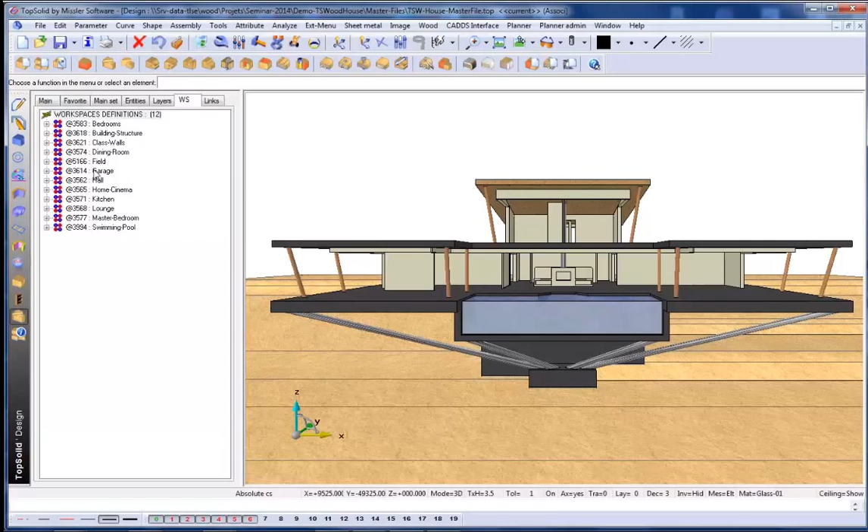Hi everyone, what I'm going to show you today is how to use and create library items to further reduce drawing times in your projects.

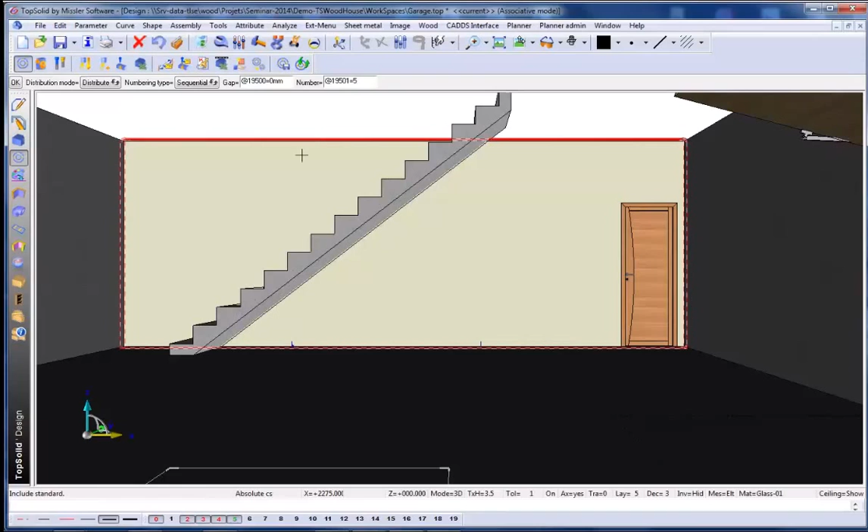Let's open up this garage and bring in what's called a volume. A volume allows you to create an area you may want to fill with, say, a unit or some piece of joinery. So let's create five volumes here and cut it so it's got that slope underneath the stairs.

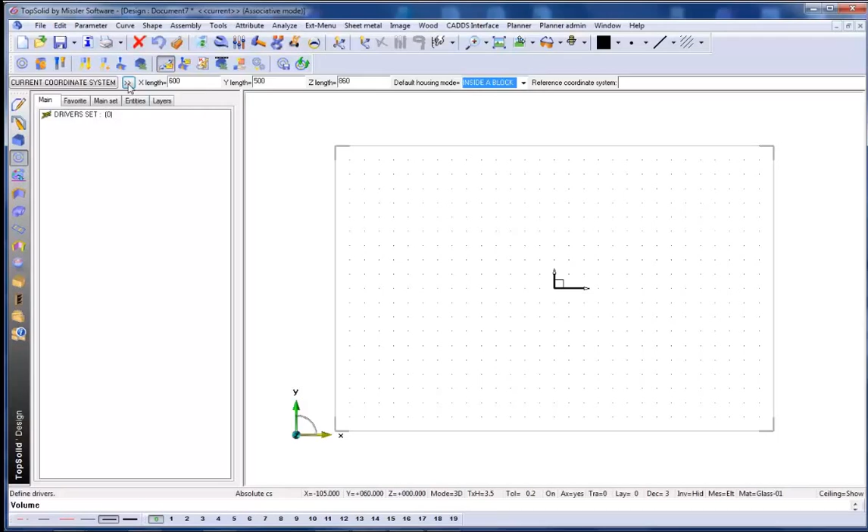Now let's open a brand new drawing to create a brand new library item. We'll start with a driver block, call it volume, and input a few sizes. We'll give it a slope of maybe 30 degrees, and once we rotate it, you can see that slope. So again, it's just a volume.

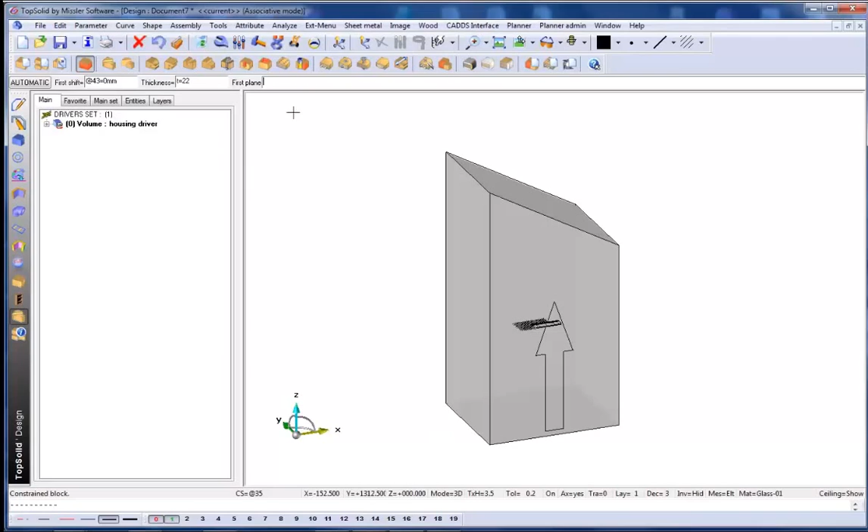Let's now start filling that volume in with actual panels. The thickness of my panels might be 22, could be 25, 18, or 16. Let's raise this maybe 110 mil off the ground because we might want some adjustable feet.

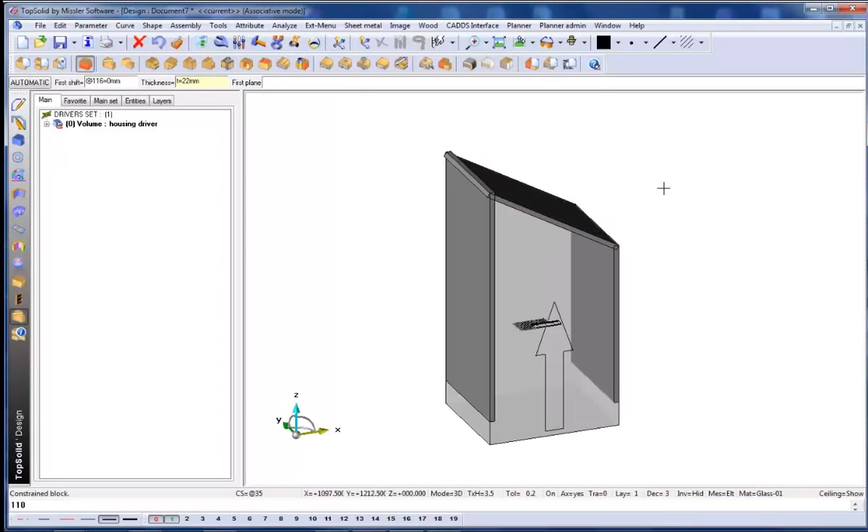Let's create the other side. You can copy that as well if needed. Now let's create the top also, and even though it's at an angle, we can create that top. So now we're going to create our bottom. And there we have it.

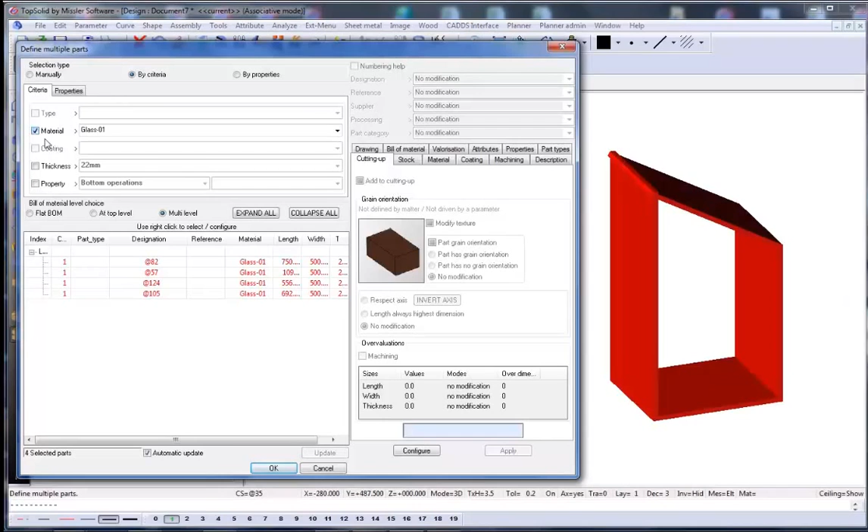Next step, we may assign an assembly here and assign parts, names, materials, and so on. So now let's assign a new material, apply that, and press OK. You can see the material applied to that particular part.

Now what we're going to do next is assign a miter to both ends, and again it's an automatic process, you don't have to draw the miter itself.

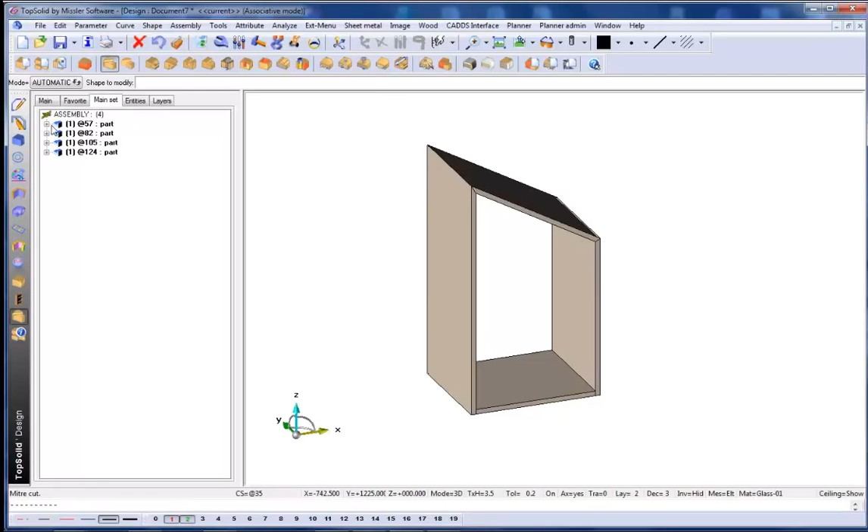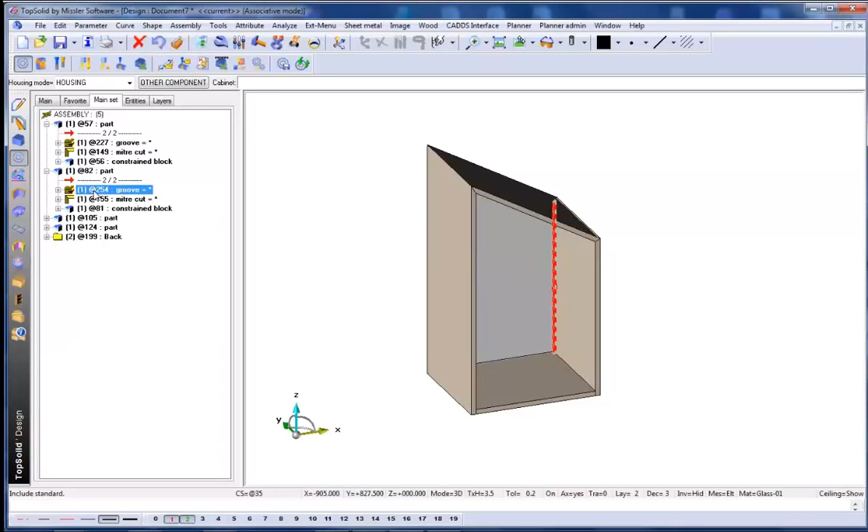Now next we can bring in our back. With our back we could already have a groove assigned, so it brings in the operation automatically when you assign the back to this unit. As you can see, we've got our groove on our parts.

That tree on the left hand side gives you a complete rundown and history of your drawing, so you can delete or modify those items or functions afterward.

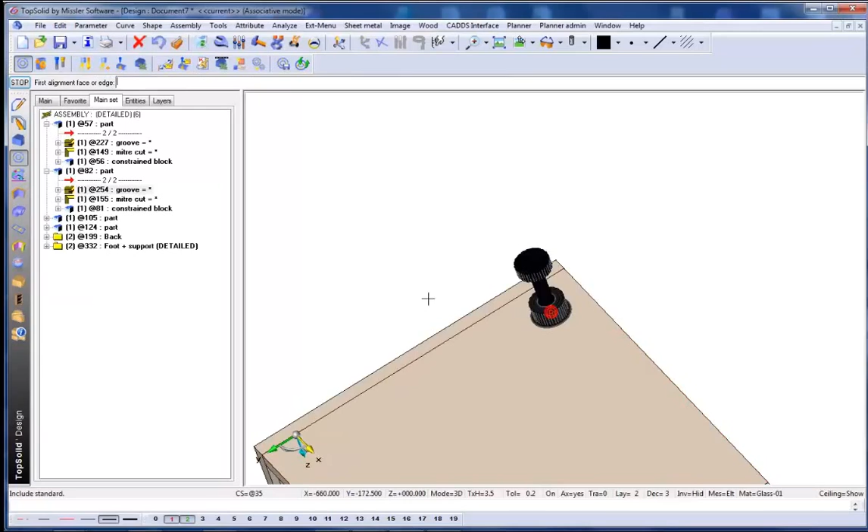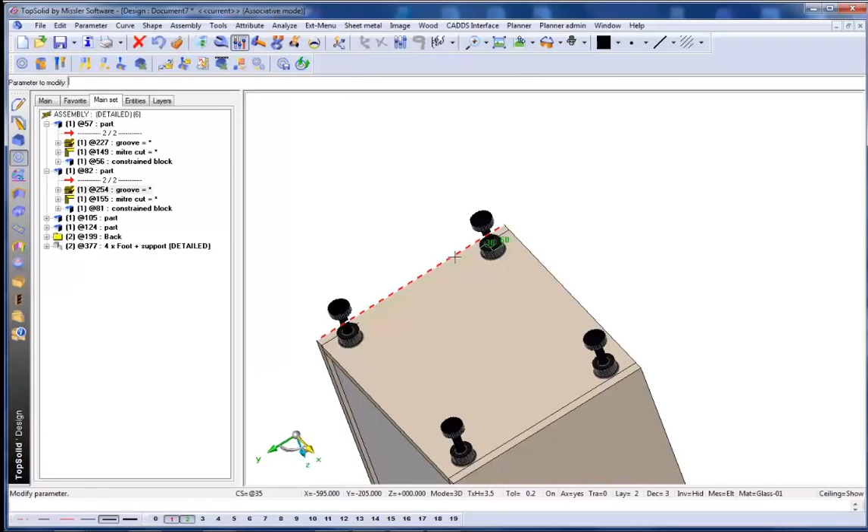Now we're going to bring in our feet, our adjustable feet. We can position them wherever we want, and copy them using our copy function and transformations. We can reposition it and again it modifies all the other associated parts, so they're all connected in some way here.

We've got our holes assigned to this as well, so it's got all the machining operations assigned, both to the groove back and also to my adjustable feet.

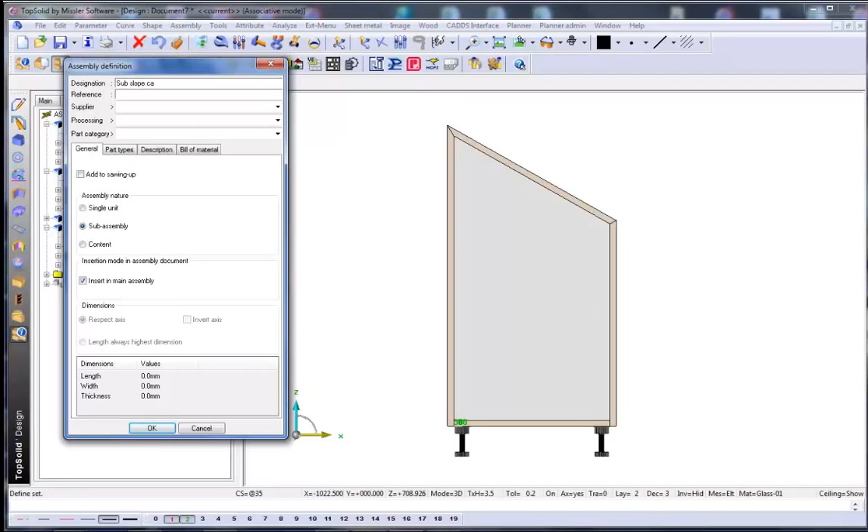Now let's just give this whole drawing a name, we'll call it a subslope cabinet. Nice and easy. Save that into any location appropriate, so just into my temp folder here, and let's open up the other drawing.

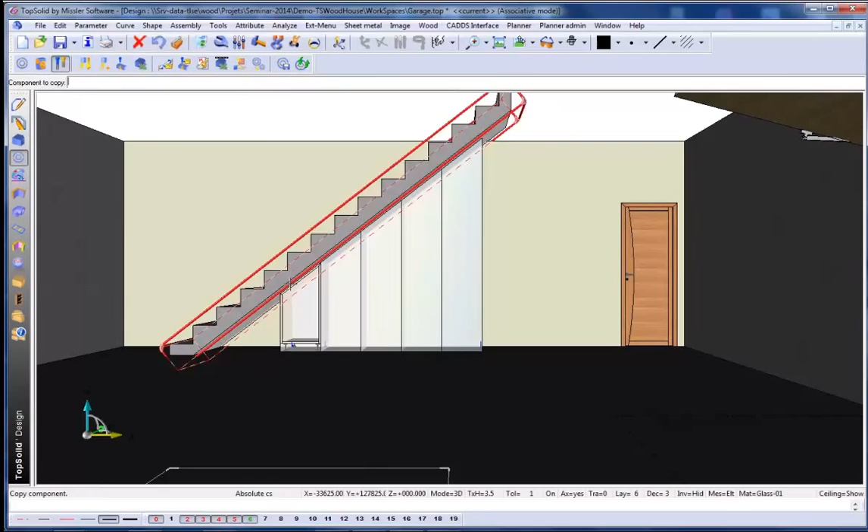We're back to our drawing, we've got our volumes here. Now what we're going to do with this volume is bring in that unit we just created in front of you, and copy it into all our other volumes. There we have it. There's our copy function and our serial function that allows us to copy it into all the other existing volumes.

So here we're just going to change the width of that particular unit, and it decreases the other units but keeps the original overall size. Very intelligent. So we can reduce that once again, the number, and you can modify that whenever you need to afterwards.

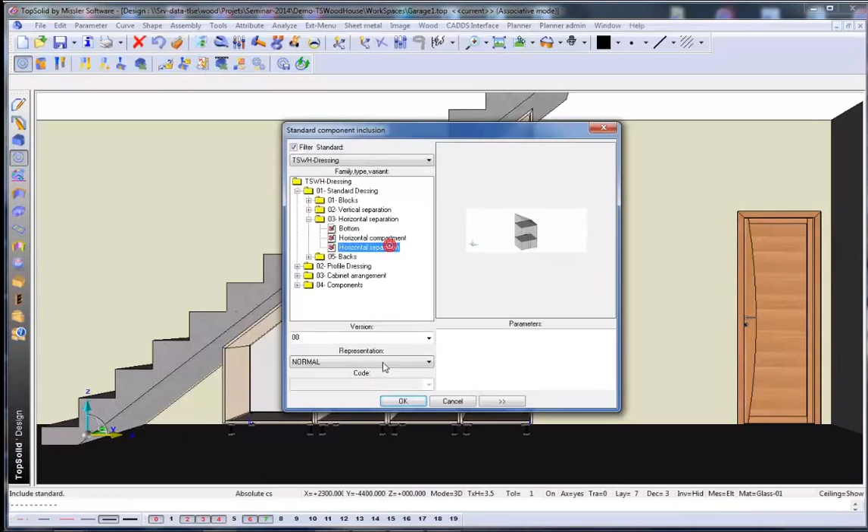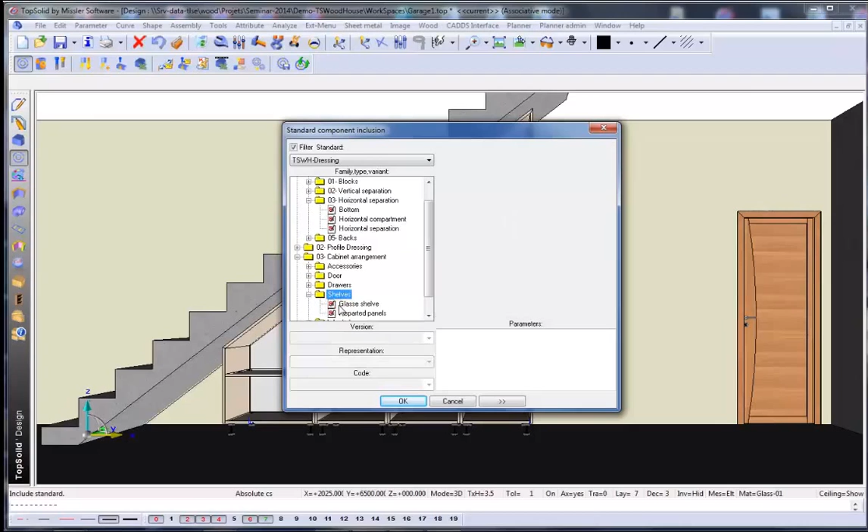Now let's open up a fixed shelf here, let's bring that into each unit. Here we might say 300, 400 mils, we'll change it to measure from the bottom, and let's make the machining automatic here. So not only are we bringing in the items, but we're also assigning the appropriate machining for production.

What we're going to do also here is include adjustable shelves. Now we're going to have group machining, or group adjustable pinholes. As you can see, we've got two above and below, we're having three here, and in the last one we might include four adjustable shelves. So we'll include that and make it automatic.

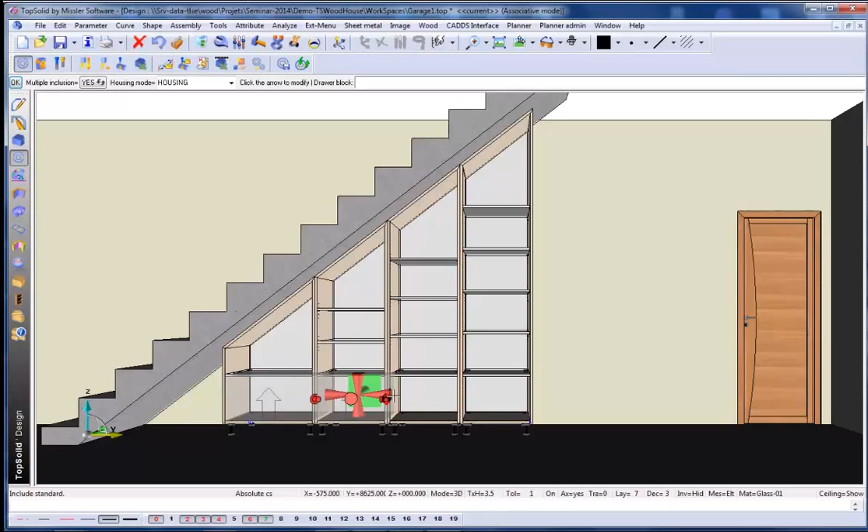Now let's bring in a few drawers underneath the fixed shelves. It's the same idea for oven units and other units you may use. You can bring in these drawers into an area of a size of your choosing. As you can see, I brought in these drawers all at once into an area that I picked.

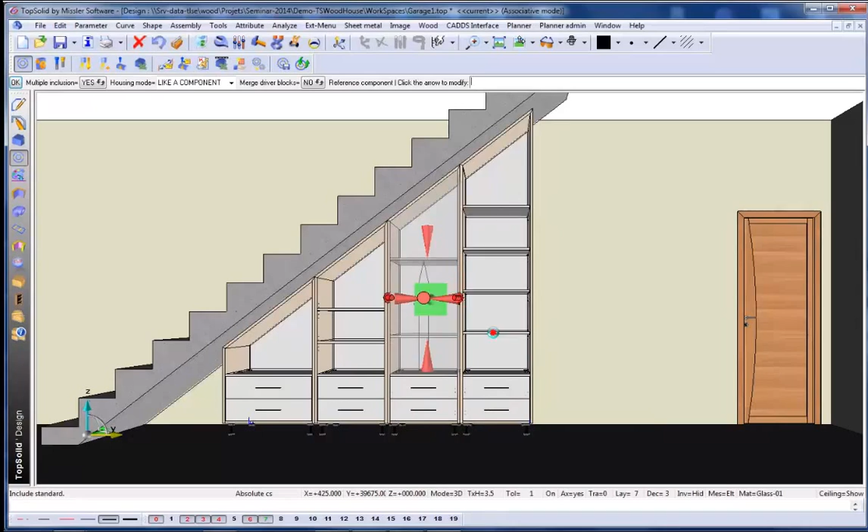Now let's bring in a couple of doors, into this area here and also to the right hand unit. As you can see, we've got two doors here, but we're just going to change one of the doors from a left hand to a right hand door. As you can see, we've changed it, and that's also changed the hinging, not just the handle of the door.

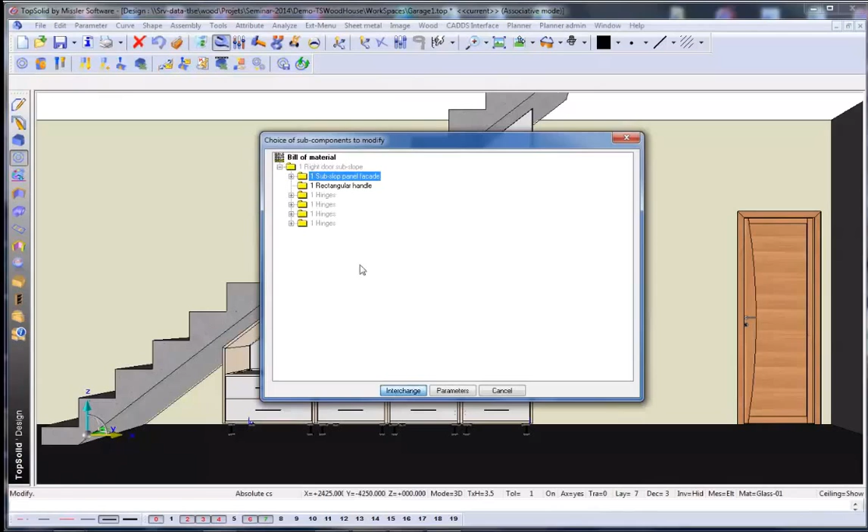What I want to do now is interchange it with a different style door. So there you go, and we'll change the other right hand door as well at the same time. Nice and easy, how simple is that? Now let's do the exact same thing with the drawers, change the front face and change all four.

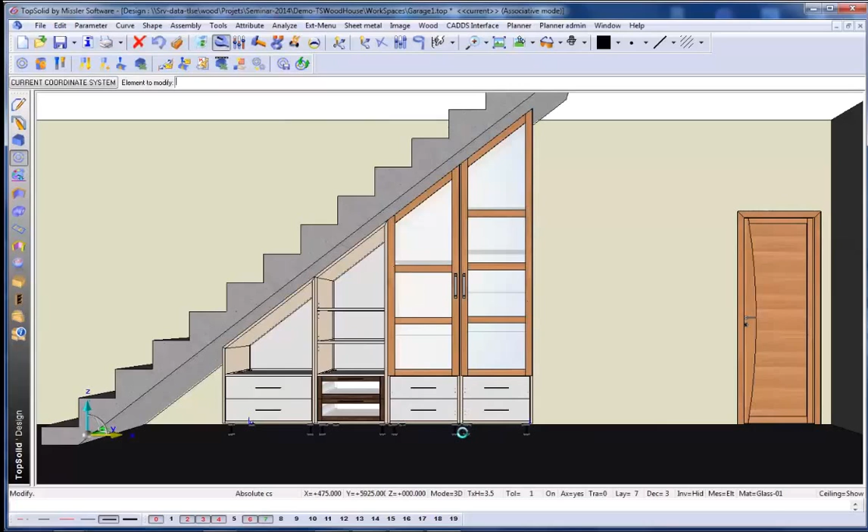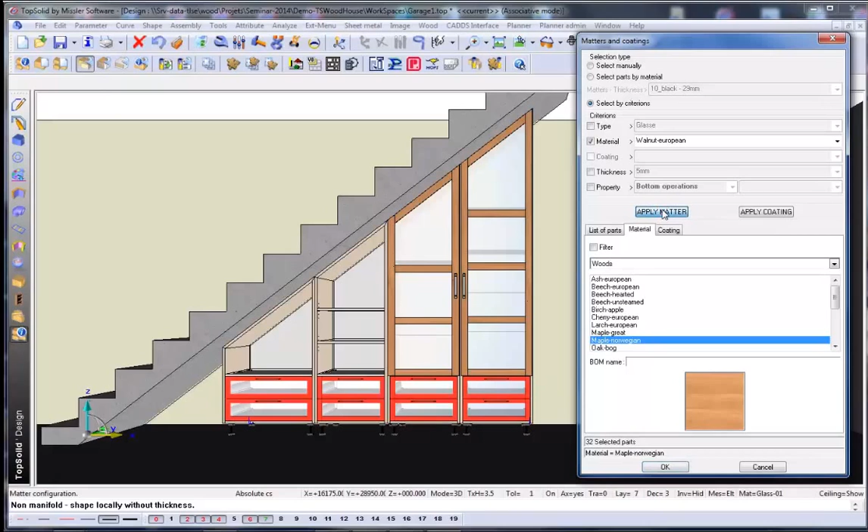As you can see here, we've got different materials in this drawing, and you can see there's a different material to the doors and to the actual drawers. So let's bring it back all to the same material. Let's pick all our drawers at the one time, I don't have to manually pick them, you don't need to do that anymore. So let's pick those drawers, apply the material we want, and press OK once we're happy. So there you have it, there's our materials.

Now just to show you the machining here, we've got our fixed shelf holes, we've got adjustable shelf holes, and of course we've got our drawer runner holes as well.

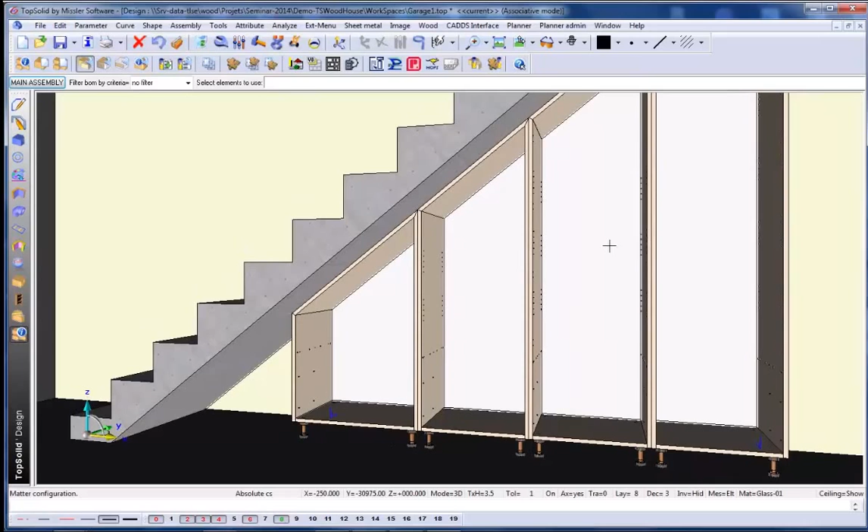So what I've shown you today is how you can use TopSolid to create your own drawings, use them as library items to decrease time spent modeling, and even quickly make changes to revisions. We can help improve your setup process. So give us a call. Bye now.